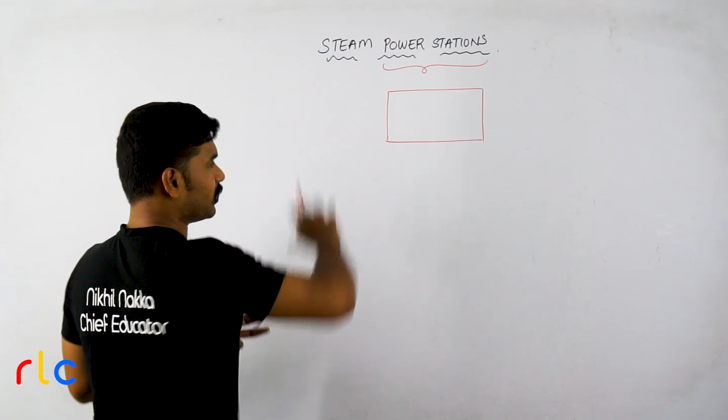Power station is a station. What is a station? Station is a combination of some equipments. So there are some equipments in this station. What is this equipment doing? This combination of equipments is the station. This station will convert some form of energy which is directly available in the nature into finally electrical energy which we require,

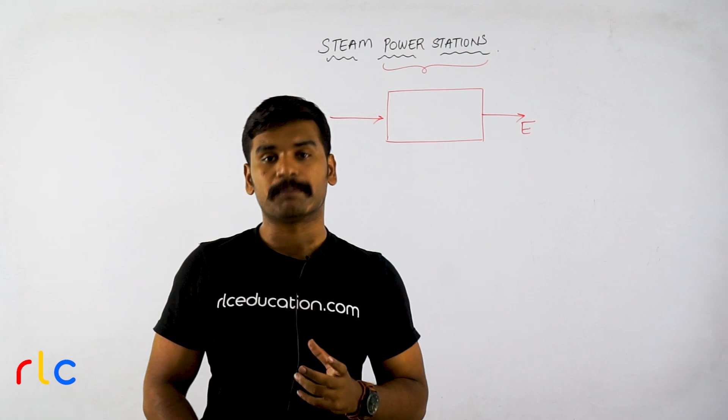because that is what our aim is, because energy resources are scattered and different types of energy resources are available in the nature which are actually useful to us. But the problem associated with such energies is that they are not available whenever you want, and another problem is the transportation problem. Therefore, we are dealing with a unique energy called as electrical energy. So, we are using a combination of equipment called as a power station. He will convert some form of energy into electrical energy.

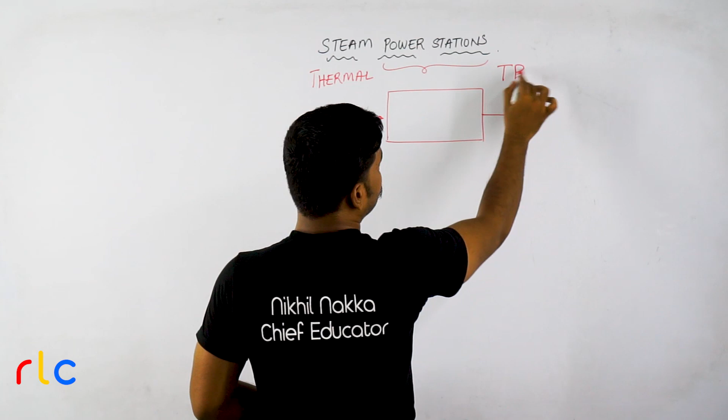So, if that conversion process from some other form of energy to electrical energy involves steam, then it is called as a steam power station. This steam power station has got another name, generally called as thermal power station. So we will be using this short form TPS, thermal power station, throughout our discussion. Why is it called as thermal power station? Because steam is a representation of thermal energy, which is nothing but heat energy.

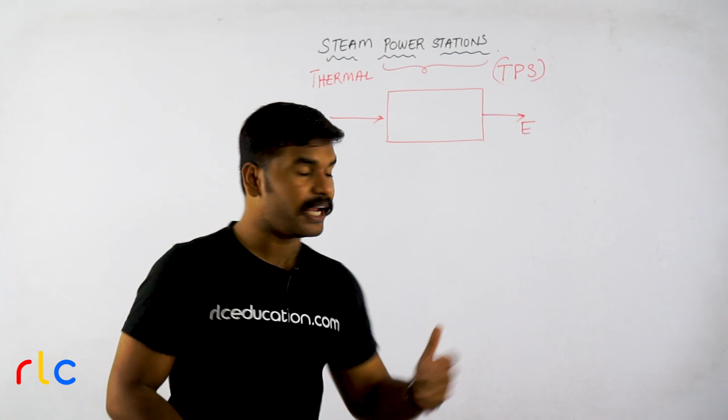How can you say that? Because what is a steam? Steam is nothing but evaporated water, isn't it? When water traps heat, then it will be evaporated into water vapor. That is called as the steam. Therefore, steam is nothing but the representation of thermal energy. So, any power station which involves production of steam in order to create electrical energy is called as a steam power station. So, to produce steam in any steam power station, what do we require?

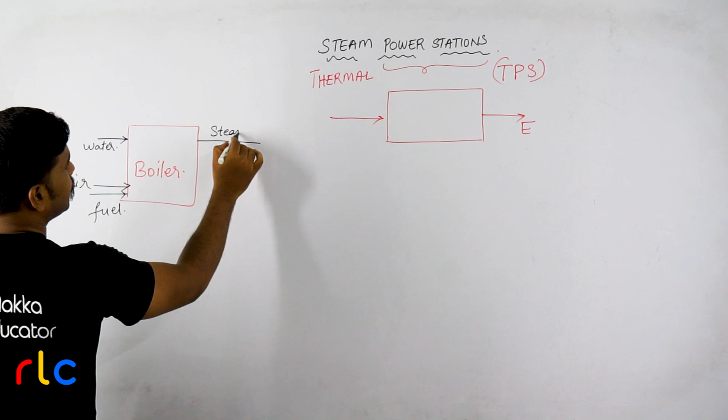We require a device which can produce steam. We are calling it a boiler. To this boiler, as the name itself says, it requires some water, and you also have to supply it with some fuel, and along with fuel you have to supply air. Why? Because you want to burn the fuel in the presence of air so that you will get the heating effect. This boiler has got a furnace where you will supply the fuel and air mixture, and this will heat up the water, and this water will boil, and finally from the boiler you will get steam. So this is how we produce steam in a steam power station.

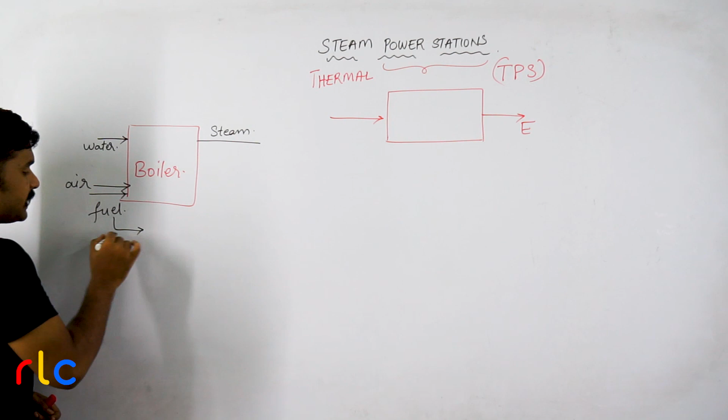Now the next important thing that we have to consider is, in this boiler you have to burn the fuel. What is the fuel? So the point here is the fuel type. In a thermal power station, the fuel may be coal or it may be oil. Depending upon that particular country's geographical condition or mineral resources, whatever is most easily available will be the fuel. For example, in India we are plenty with coal reserves, so most Indian thermal power stations use coal as input fuel.

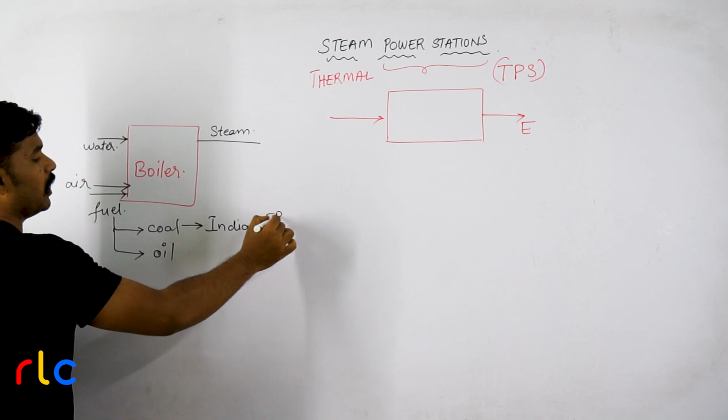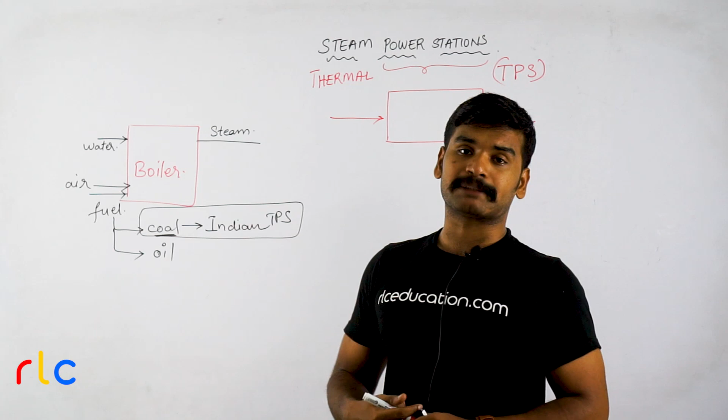So this becomes a very important question for competitive exams. They ask the input fuel for thermal power stations in India, and it is coal, not oil. In US, it is majority oil. In Middle East countries, depending upon their availability of fuel, it is oil. But in India, we are having plenty of coal reserves, therefore coal is the input fuel for Indian thermal power stations. Now, in the Indian context, there is one very important relevance of thermal power stations. That is, in India, 67% of power is generated from thermal power stations only.

So that is the significance of thermal power station. This thing we have already seen. So in the exam, he will ask you how much is the share of power generated from thermal power stations in India. That is 67%, or you may also say 2/3 of total power generated in India is from the thermal power stations only.

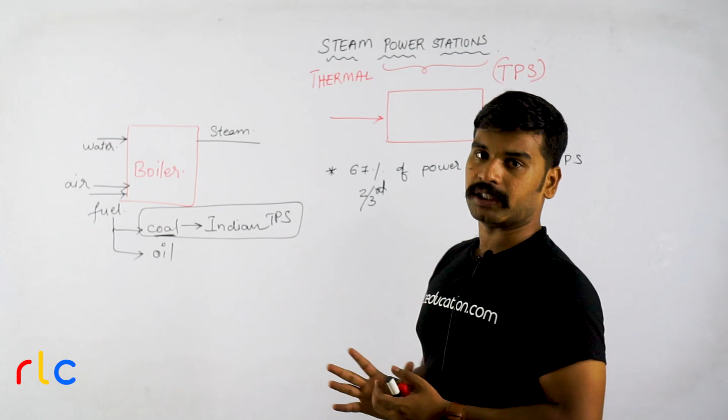So okay, now we will see how this production of steam will actually help us in converting some form of energy into electrical energy. Now, if you see here, initially what is directly available in the nature? Tell me what is the natural resource that is available in the nature? That is nothing but the fuel. In India, coal. Now you are having coal. So my final intention is to convert coal into electrical energy in this thermal power station. So what is that energy present in the coal? Coal has got chemical energy. The form of energy in coal is chemical energy.

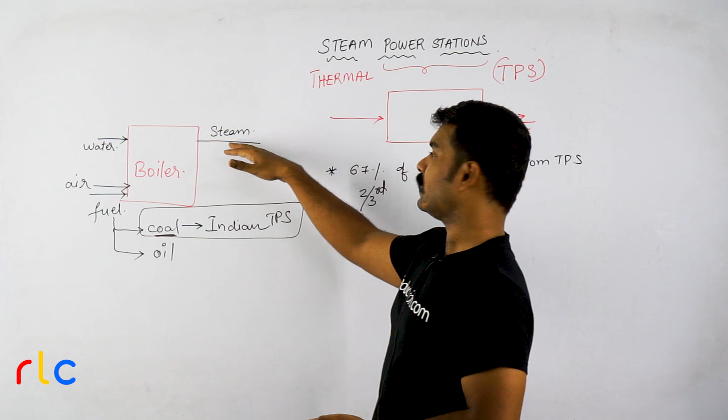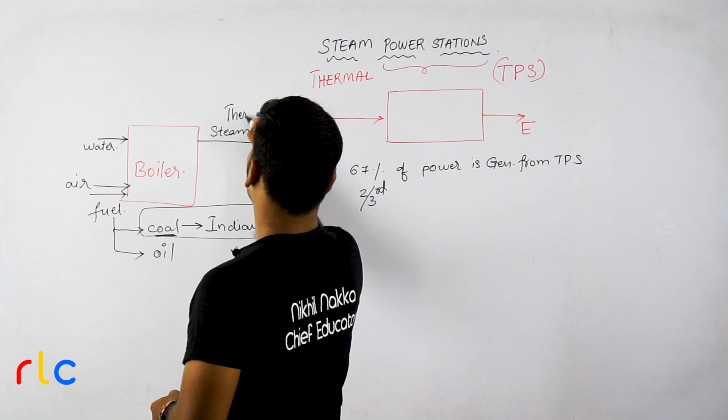Upon heating coal in the boiler, you are getting steam as output. Steam is a representation of what energy I told you? Heat released by burning of fuel is utilized by the boiler to heat the water and create steam. To the boiler, input energy is chemical energy in the form of coal. Output energy from the boiler is steam, which is also called as thermal or heat energy. Okay, thermal energy is created.

Now you see different processes will take place, or a combination of equipment will try to process this energy. What energy is directly available? Chemical energy in the form of coal is there. So that you are processing in different stages and finally make it into electrical energy. So that is the entire gist of thermal power station.

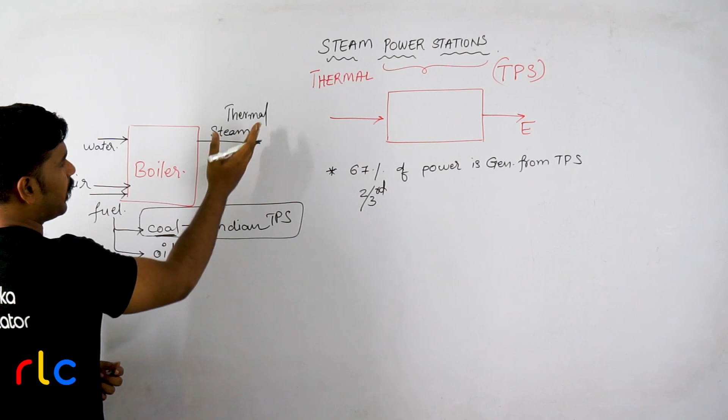So once you get steam from the boiler, this steam has got certain temperature and some pressure. When the steam is having pressure, it is moving in the tubes. So with this pressure, this steam will strike the blades of a turbine. So there we are having a device called a steam turbine. What will this steam turbine do? Let us say a steam turbine is simply like a wheel, something like this. This is not exactly, but something like this.

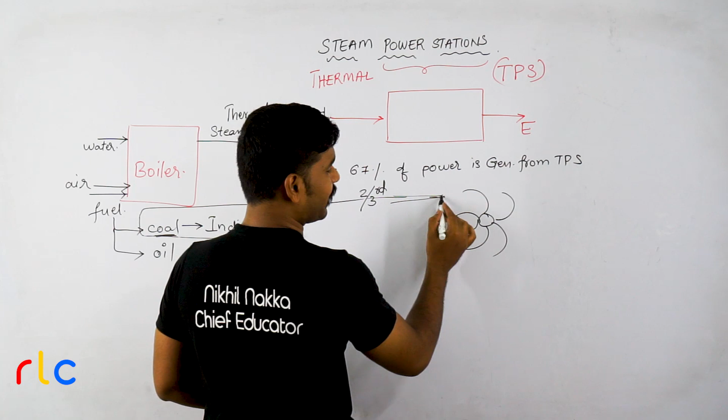Let us say I am having a pipe which is carrying steam. Now in this pipe steam is coming and you are releasing the steam, and this steam is striking these blades which are mounted on some rotor. So this fellow starts rotating. So what is the turbine actually doing? Turbine is converting steam energy or thermal energy into mechanical rotation at the output. So turbine is an energy processor which will convert thermal energy into mechanical energy.

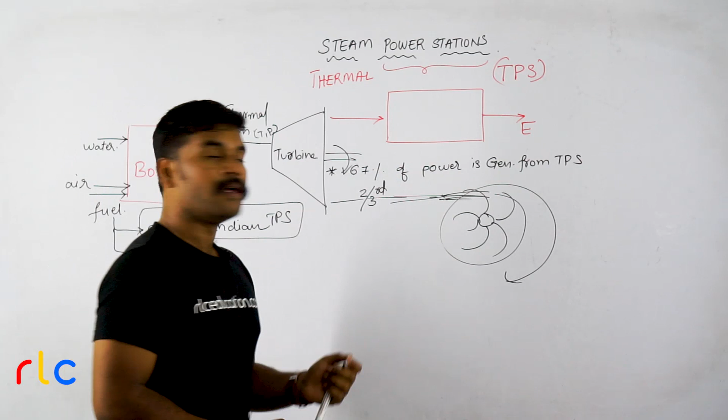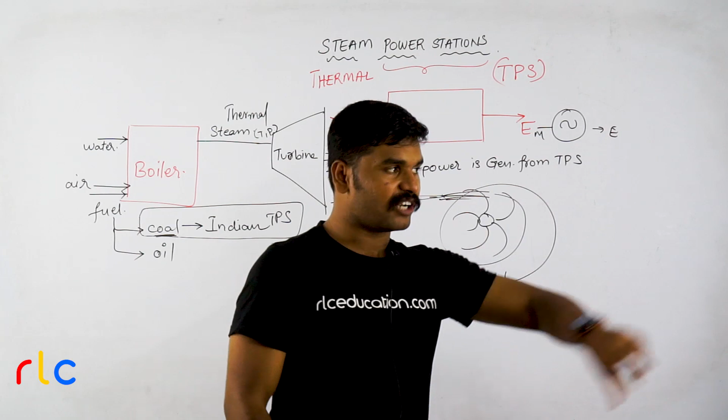Now once you got mechanical energy, in electrical engineering, what is that device which is used to produce electricity or EMF? Generator, isn't it? A generator is a device which takes mechanical as input and provides electrical as output. So the entire drama that takes place in any power station is to convert that particular form of energy which is available in the universe to mechanical energy. Once you get mechanical energy, your job is done. Just put a generator, generate electricity, that's it.

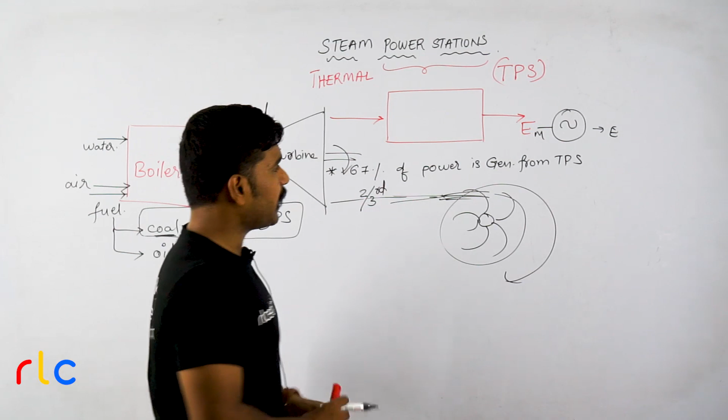Understood? So this entire process of production of steam and all is to finally create mechanical energy or a mechanical rotation. Once you got the mechanical rotation, supply it to the generator and you will get the electrical energy output. So that's the entire formula, or I can say the entire conclusion for thermal power station.

So to define technically what is a thermal power station: it is a power station in which heat released by burning of coal is utilized by the boilers to raise steam at high temperature and pressure, which is used to drive a turbine which is coupled to an electric generator. That's it. So that is the definition of a thermal power station. This definition itself says everything.

So if you look at the exchange of energy, as I told you, according to the law of conservation of energy, energy can be neither created nor destroyed. It can just transfer from one system to another system. So here we are having the coal energy or some fuel energy, converting it into electrical energy. Let us see what is actually happening.

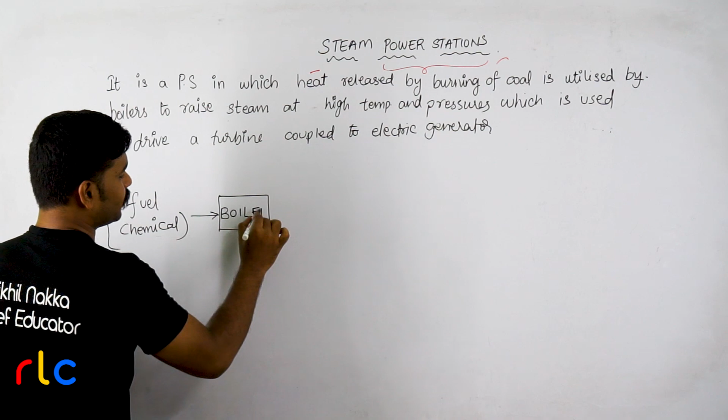So if you look at this thermal power station, initially you are having some fuel, hydrocarbons, which is having some chemical energy. This chemical energy I am going to supply to a device called a boiler. The boiler provides you output as steam. What is this steam? Steam is nothing but thermal energy. And this thermal energy or steam energy is supplied to some device which is called what?

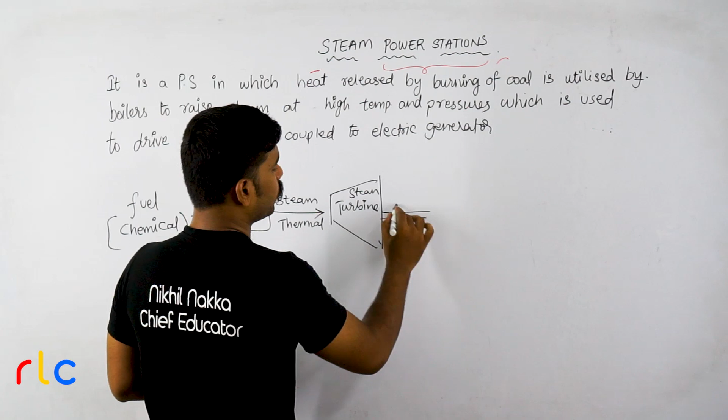A turbine. It is a steam turbine. What is this steam turbine doing? It is taking thermal energy as input and providing you rotation of shaft as output. This rotation of shaft is nothing but mechanical energy. And this you are coupling to an alternator or a generator, and once you give mechanical energy to the generator, you will get electrical energy as the output.

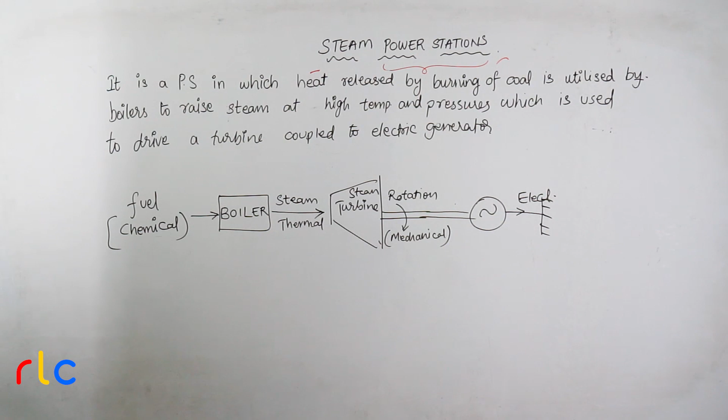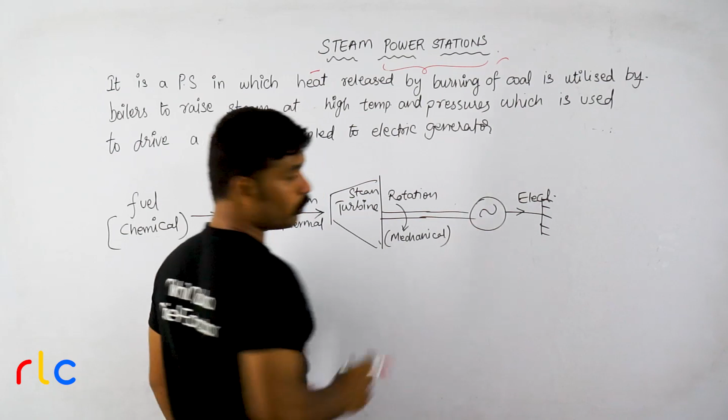So this is how energy is processed in a steam power station, or simply any power station is basically an energy processing setup. You have input as chemical energy, and you process it in 3 levels. At the boiler you are converting chemical to thermal, at the turbine thermal to mechanical, and at the generator mechanical to electrical. So 3 stages, or 3 levels of conversion, are involved.

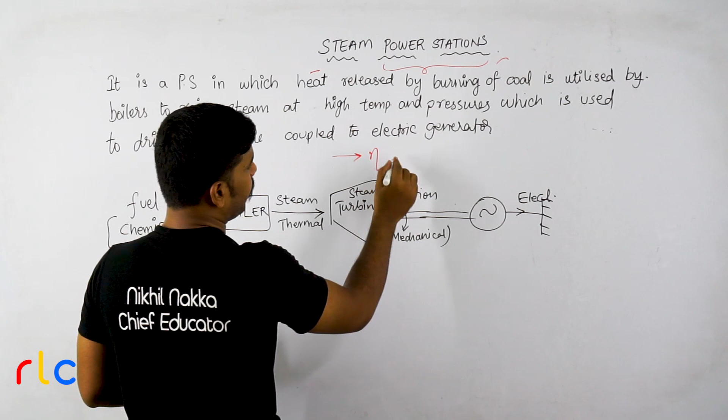Practically, when energy transfers from one system to another, not all of it transfers; a part is lost in the form of losses. So more the number of stages of conversion, more will be the losses. A steam power station has more stages of conversion, therefore more losses and poor efficiency. The efficiency of this conversion process is around 29 to 32% for a thermal power station.

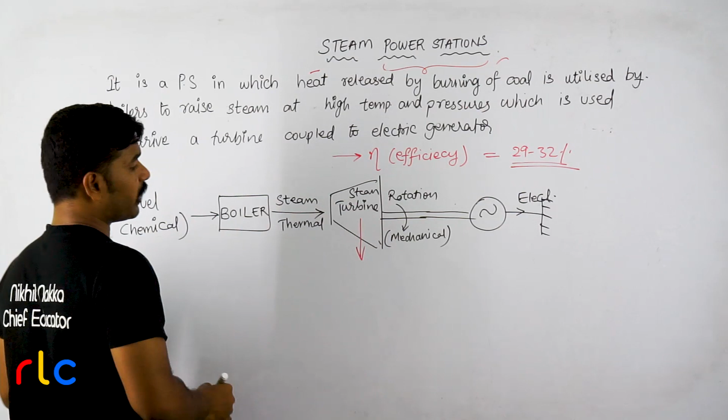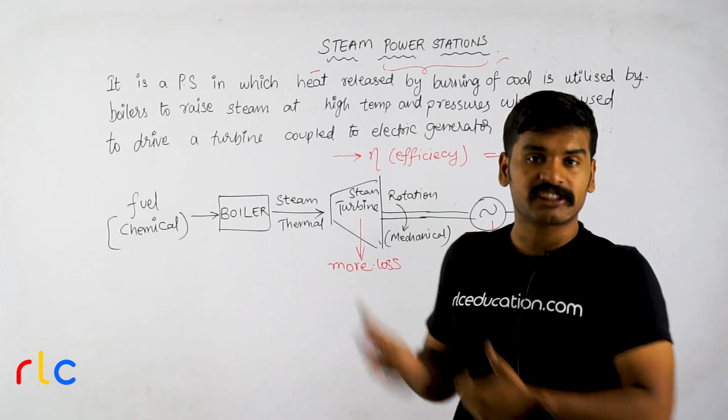Why? Because there are 3 stages of conversion involved. You get more losses in this stage, the turbine, and the least losses in the generator. Since energy conversion takes place at 3 devices, the boiler, steam turbine and electric generator are the core components of a thermal power station. Without these 3 things, you cannot construct one. Others are like accessories which enhance its functionality or improve its efficiency.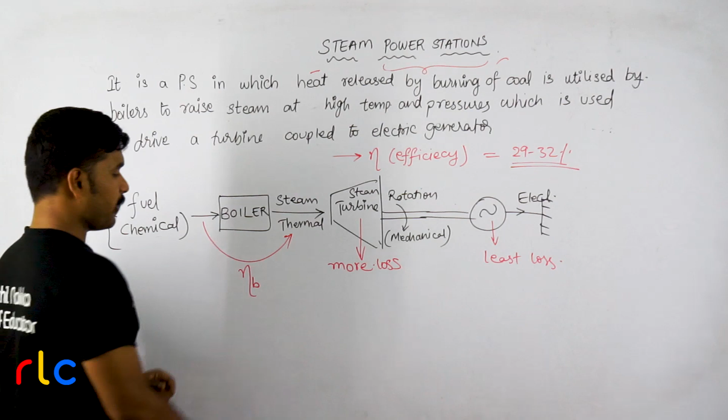At the boiler you have energy conversion from chemical to thermal, so we can define a boiler efficiency, eta B. At the turbine you have efficiency eta T. Turbine efficiency is also called thermal efficiency. This forms an important MCQ. Why? Because the thermal energy produced is actually processed by a turbine.

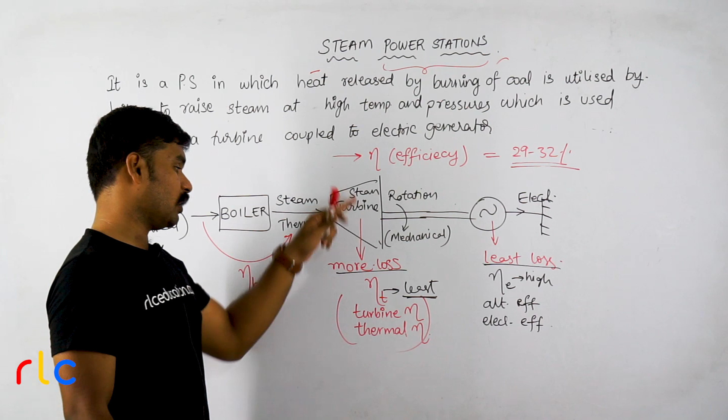Next, the electric generator has an efficiency eta E, also known as alternator efficiency, generator efficiency, or electrical efficiency. Electrical efficiency is the highest because losses are less. In the turbine more losses are there, therefore it is the least efficiency. The reason for the low efficiency of a thermal power station is the low efficiency of the turbine. And this is the overall efficiency of a thermal power station.

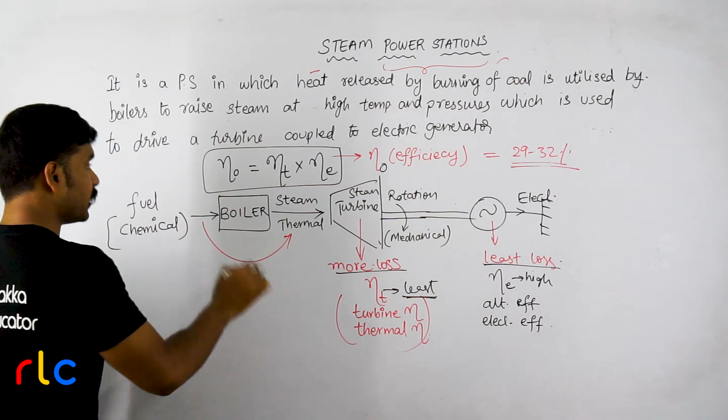And how do we define overall efficiency of a thermal power station? Overall efficiency, eta O, is given by efficiency of turbine into efficiency of generator. That's it. You shouldn't consider the efficiency of boiler due to some reasons which is out of scope of our subject.

Just be convinced that overall efficiency means we will consider the more loss component and least loss component, and boiler is not standardly taken as an efficiency. So overall efficiency will consist of turbine efficiency into electrical efficiency. Some people also say it will be the product of boiler efficiency into turbine efficiency into electrical efficiency.

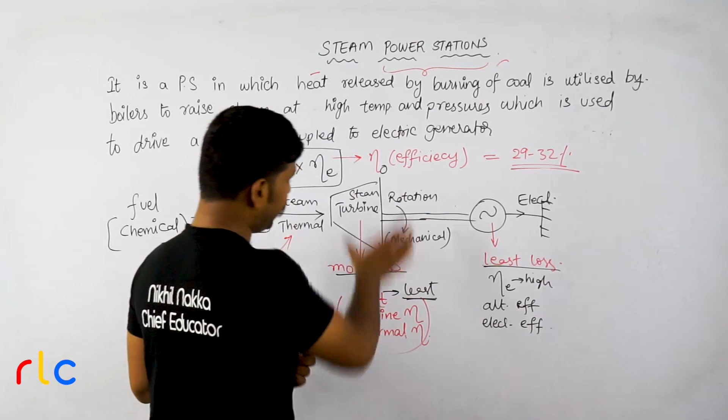Yes, this is the correct figure. Actually, by taking boiler efficiency, we will deviate from the actual figure we are interested in. Why? Because we are having more losses in the turbine, since efficiency of a steam power station mainly revolves around the efficiency of the turbine. That's where more losses happen, and this is the significant efficiency actually trying to reduce the overall efficiency.

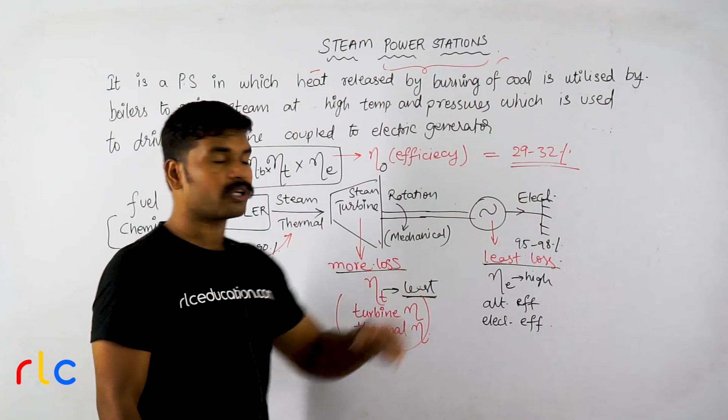Electrical efficiency is very high, around 95 to 98%. Therefore, even though you consider electrical efficiency, the overall efficiency figure is not going to change much. But if you consider boiler efficiency, whose efficiency varies between 70 to 90%, it will create a significant change in the overall efficiency figure. So due to such factors, we don't consider boiler efficiency, but take overall efficiency as turbine efficiency or thermal efficiency into electrical efficiency.

Now I want to explain an interesting aspect or important concept associated with thermal power station, which you rarely find in any textbook or notes. The three important main parts in the construction of a thermal power station are boiler, a steam turbine, and an alternator. This thing we are clear now.

Now there are some thermal power station aspects. To the boiler, what are the inputs? In a thermal power station, boiler will have basically three inputs. What are those three inputs? First, to the boiler you have to supply with water.

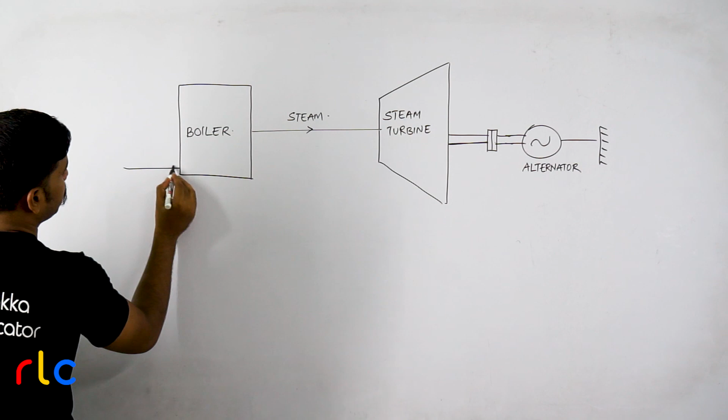Okay, you have to supply with water. And next, what do we have to supply? We have to supply fuel. In the fuel you have to burn, and along with the fuel you have to also supply air, in the presence of which the fuel will combust, because you require oxygen or air for combustion. That thing we know.

So what are the inputs to the boiler? Three inputs to the boiler: air, fuel and water. Very, very important, please be careful and attentive in understanding this. Three inputs to the boiler and one output from the boiler, which is the steam.

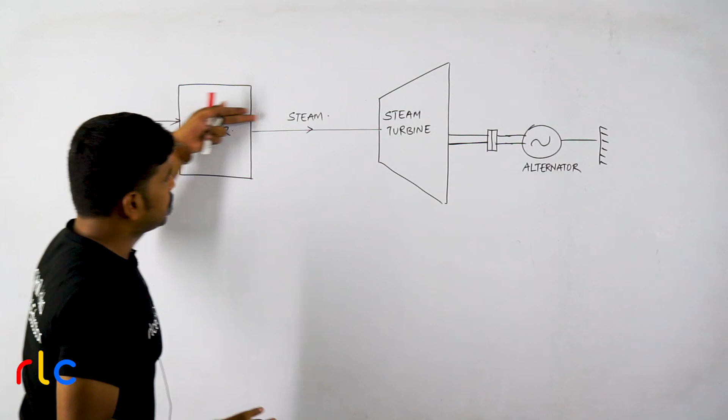This steam will go to a steam turbine, and in the steam turbine this steam will expand. What do you mean by expansion of steam? Steam expansion means steam is rotating the turbine. In the process of rotating the turbine, pressure will drop, because the steam is impinging the blades of the turbine and dropping the pressure as the blades rotate.

Understood? So according to universal gas constant, PV is equal to constant. Pressure and volume are inversely proportional. If pressure drops, volume will increase. That is the reason why we always represent a steam turbine in this fashion. This is the standard diagram for a steam turbine, meaning that at the inlet if you have some volume, by the time you go out the volume will be rising, because there is a drop in pressure.

So how much pressure will drop, sir? That is the question I am giving you. How much pressure will drop in a steam turbine? Let me give you an example. Steam turbine means it should have some input and some output, which is nothing but exhaust, like your vehicles have an exhaust silencer, isn't it?

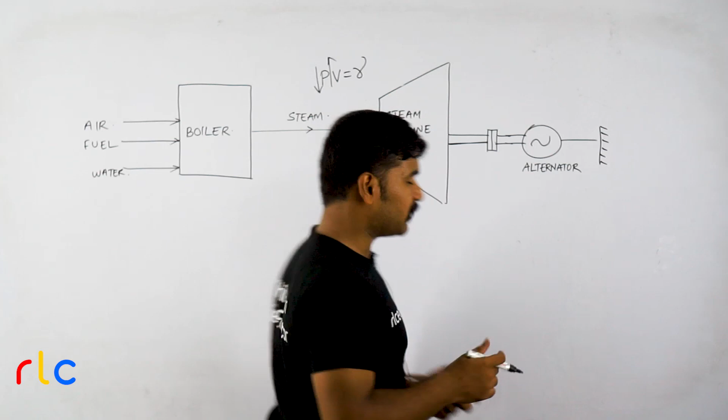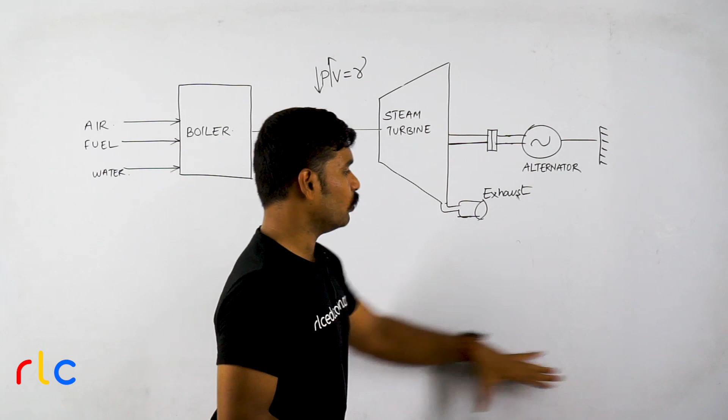Let us say steam turbine is also having some silencer like this, a Royal Enfield silencer kind of thing. Let us say this is exhaust, and this is exhaust. Where is this exhaust connected to? This exhaust is in the atmosphere. This exhaust outside is what? Atmosphere. And what is the inlet to the steam turbine?

Inlet to the steam turbine is from the boiler. Steam is the inlet to the steam turbine. So in the boiler, steam is generated at a certain pressure. Let us say, for example, the pressure is some 100 units.

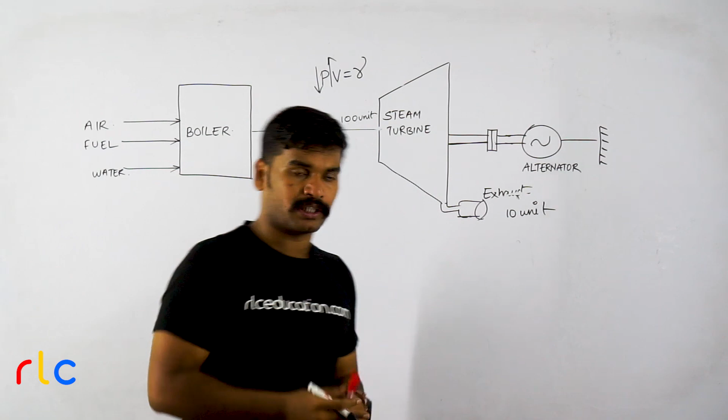Input pressure of 100 units is coming into the steam turbine. But the outlet, let us say exhaust, what is the exhaust connected to? Exhaust is connected to the atmosphere, and let us say atmospheric pressure is some 10 units. Atmosphere will naturally have some pressure, isn't it? Now tell me, what is the difference in pressure?

What is the pressure difference finally available in the turbine? Here 100 units, at the exhaust 10 units. In between, how much are you having? 90 units of pressure is there.

But actually in this boiler, how much are you producing? You are actually producing 100 units. And how much coal are you using? You are using that much amount of coal which is enough to produce 100 units. But actually, with how much pressure is the turbine rotating? The turbine is actually rotating with 90 units of pressure only.

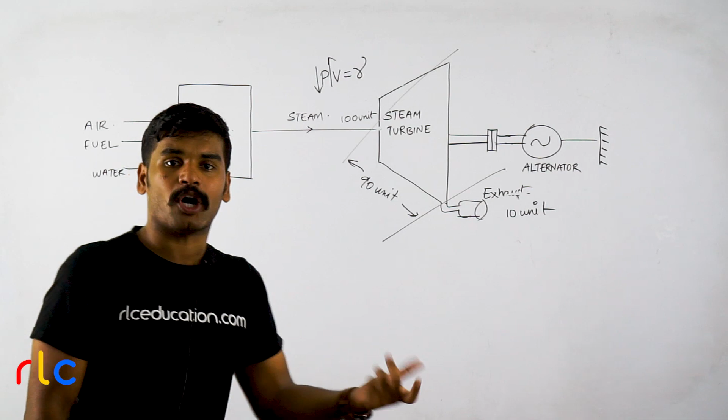Then what happened to the remaining 10? Did dogs take it away? No. Due to the presence of higher pressure on the exhaust side, you are not able to use whatever you are totally producing. Because of this exhaust, you are not able to totally utilize the entire thermal energy that you have produced in the boiler, and that is why the turbine efficiency will be very low due to this factor.

So now tell me, sir, what can we do to improve this situation? What is the situation? I am supplying 100 units of pressure, but actually only 90 units of pressure is acting in the turbine. So the remaining 10 are getting lost.

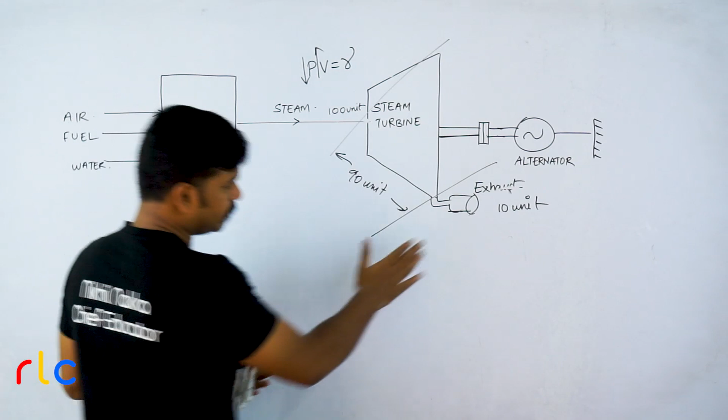So there are two things I can do to overcome this problem. Since your exhaust is connected to atmosphere, and atmospheric pressure is some 10 units, it is constant - atmosphere does not change. One thing I can do is increase my input pressure. Let us say, instead of 100, if I make my input pressure 1000, then what will happen to the effective pressure? Effective pressure would be 1000 minus 10, that would be 990.

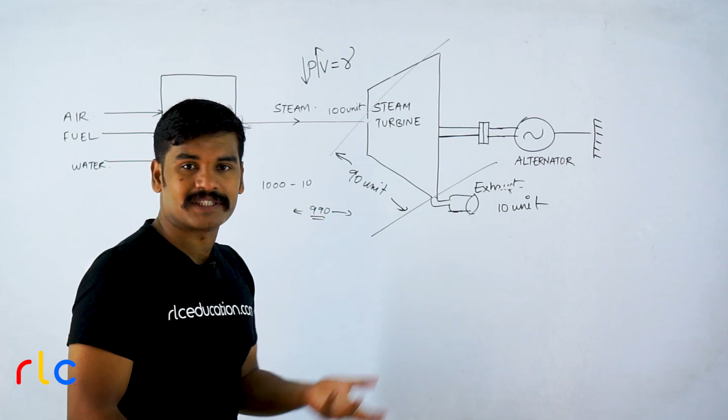In 100 units, 10 units is 10%. But in 1000 units, that same 10 units is simply 1%. So by increasing the input pressure, we may try to improve the efficiency. But do you think increasing the pressure is practically possible all the time? No. Why? Because to increase the pressure, you have to increase the boiler size, cost of the boiler will increase, maintenance of the boiler will increase, and to withstand those huge pressures, you should also have the piping systems or conduit systems. Accordingly, the cost, maintenance and operation also become complex.

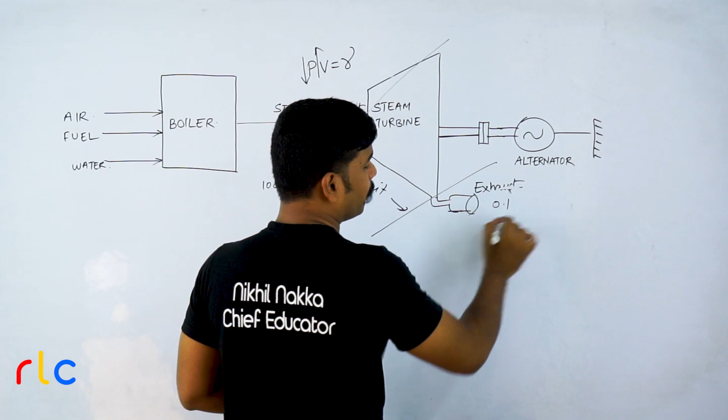So that is not practically possible always, because theoretically you may say we can reduce it to 1%, but it's not like that. The other way is, what if I can reduce the pressure at the exhaust? Let us say, instead of 10 units, by some artificial means, I will maintain only 0.1 unit pressure. If 0.1 unit pressure is there, and input is 100 units, what will be the effective total units? 99.9 units. Don't you think the efficiency is increased? Yes, turbine efficiency will increase, isn't it?

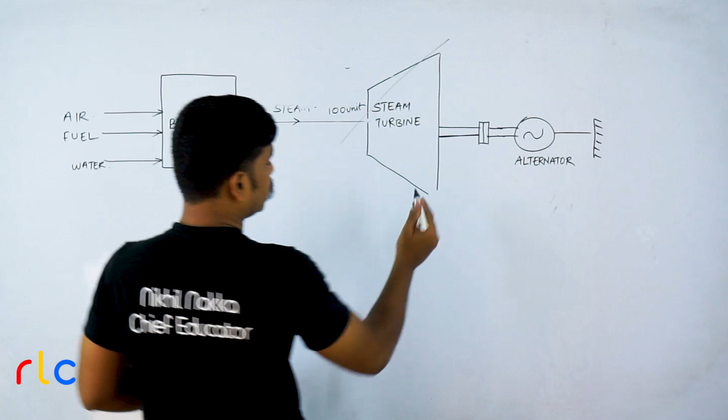So this is the actual procedure that we will follow. What we will do is connect the exhaust to a low pressure unit. We will connect the exhaust of the steam turbine to a low pressure device, which is called a condenser. So this is the output or the exhaust of the steam turbine. I am connecting this to a condenser.

So the condenser is such a place in the thermal power station which has the least pressure, less than atmospheric pressure. That is called a condenser. That is the reason why we connect a condenser. Why? Because now the output of the steam turbine is connected to the condenser, and the condenser has lower pressure than atmospheric pressure. So the effective utilization of pressure will be high in the steam turbine, thereby you can increase the efficiency of the turbine. So that is the effect of the condenser.

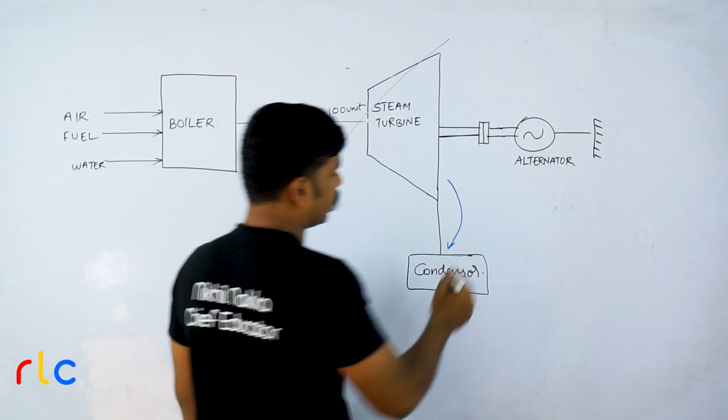The process in which steam is exhausted from the turbine to the condenser, the transfer of steam from turbine to condenser, is called bleeding of turbine. Very important point: bleeding of turbine means removing steam from the turbine and sending it to the condenser. So removal of steam from the turbine itself is called bleeding of turbine.

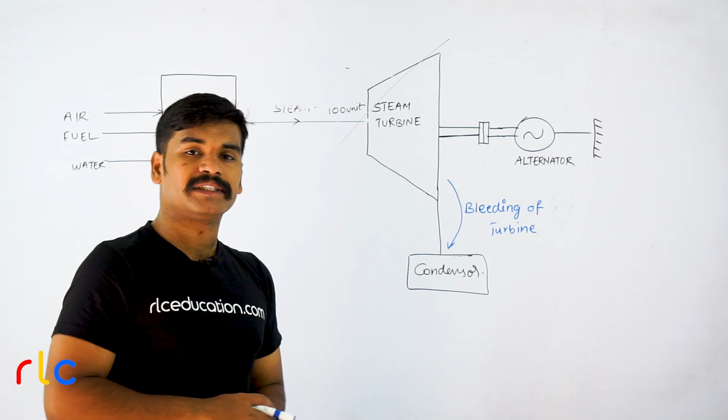Now what happens in the condenser? As the name itself says, it will do some condensation process. What is condensation process? Conversion of gas into liquid. Initially in the boiler, evaporation takes place because water is evaporated and converted into steam. This steam does useful work, expands, and comes back to the condenser. Steam is in gaseous form; in the condenser, steam converts back into liquid, that is water.

So once in the condenser, steam is converted back into water, I will use a pump. What I will use is a very big pump.

The pumps used in a thermal power station, do you know the rating? They are rated in megawatts. The power produced from a thermal power station, a greater portion of that power again has to be utilized back by the components of the thermal power station to make it run. That is the reason why the overall efficiency is also very poor.

So what this pump will do is extract the water that has been formed in the condenser and supply it back to the water circuit, and we try to recycle the water like this.

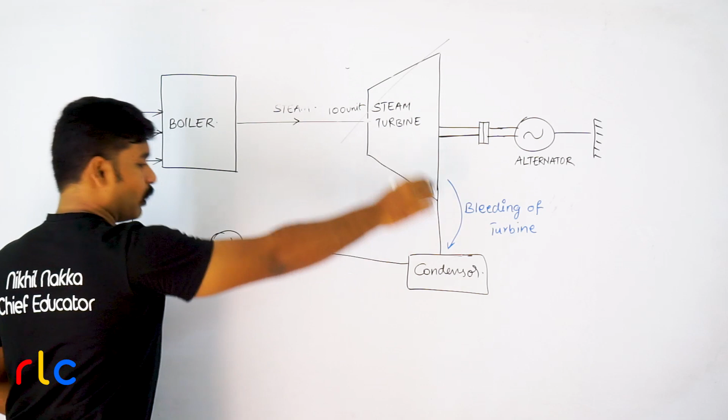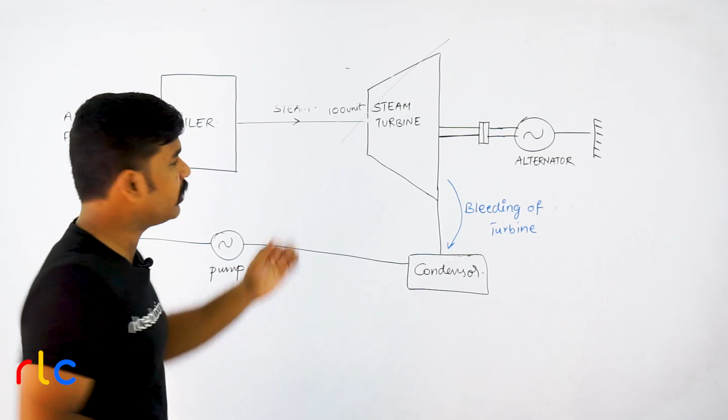So this cycle of evaporating the water, taking work from the steam, condensing the steam, and again sending it back to the boiler. The water, or the working fluid, is the fluid circulating in the cycle. Here it is water. Water is catching some heat energy. In the steam turbine, it loses a bit of that heat energy. Again in the condenser, the remaining amount of total heat is lost. And again it went back to the boiler.

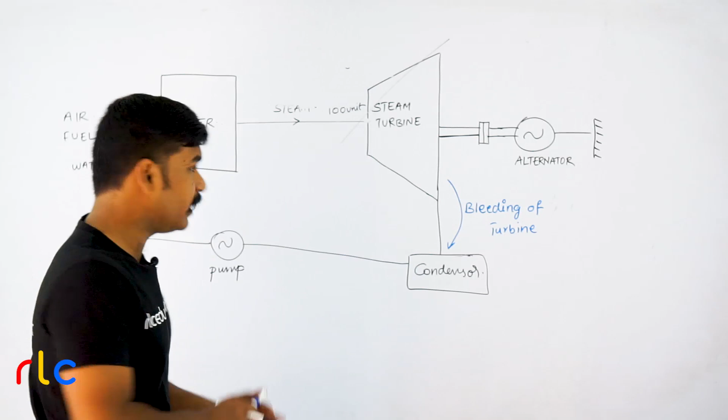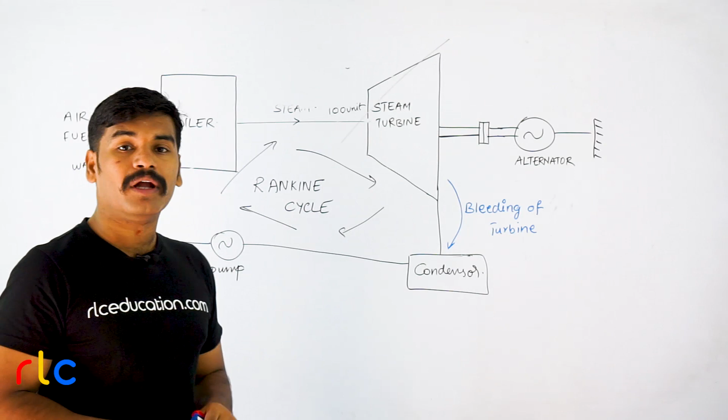So this cycle of gaining heat and losing heat, this entire cycle itself is popularly called the Rankine cycle. That is the reason why you generally hear this popular MCQ question that thermal power stations operate on a cycle called the Rankine cycle. Thermal power station operation is based on the Rankine cycle. You rarely find an explanation about this Rankine cycle in any textbook.

And they may also ask you what is the efficiency of the Rankine cycle. Efficiency of Rankine cycle will be around 32%. That is about the efficiency of Rankine cycle.

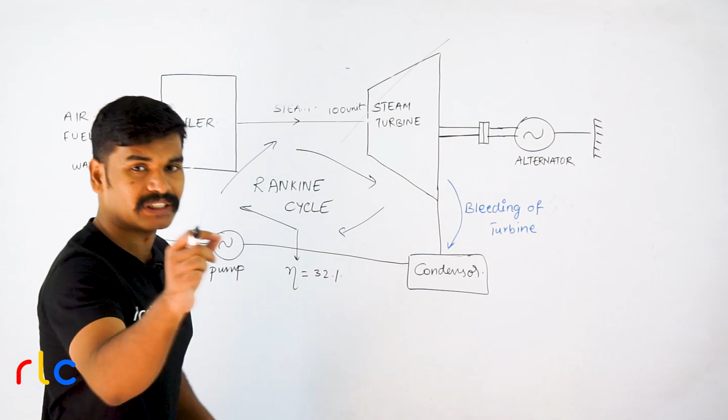Next, when will the Rankine cycle efficiency be maximum? When the heat losses are less, meaning in the summer season. In summer time, the Rankine cycle will have more efficiency, and in rainy or winter seasons the Rankine cycle efficiency will fall down. These are other aspects you can just write down, I will not write on the board.

And tell me where the major amount of heat has been lost. In the condenser. So we can say that in the condenser, the major amount of heat loss takes place.

So now we understood that the thermal power station efficiency is very poor. So how can we improve that? Don't you think there is a way? Yes, before understanding how to improve a thermal power station's efficiency, you must understand what factors actually govern or affect the efficiency of a thermal power station. So that is what we will discuss now: factors affecting efficiency of thermal power station. There are three main factors, and by controlling such factors you can try to control the overall efficiency of a thermal power station.

So the first factor is temperature of the steam. Next factor is pressure of steam. Third factor is pressure in condenser. These are the three factors which will actually affect the overall efficiency of a thermal power station.

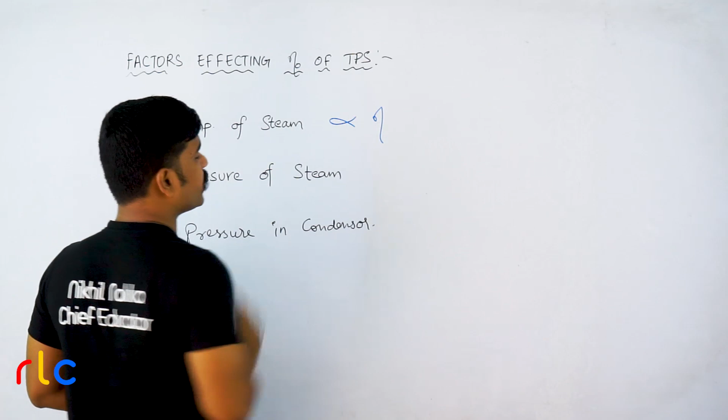Now tell me sir, how should these parameters be in order to maximize the efficiency? In fact, temperature of the steam is directly proportional to the efficiency. That means if the temperature of the steam increases, overall efficiency of a plant increases, and pressure of the steam is also in direct proportion to the efficiency. So more the pressure of the steam, more will be the overall efficiency.

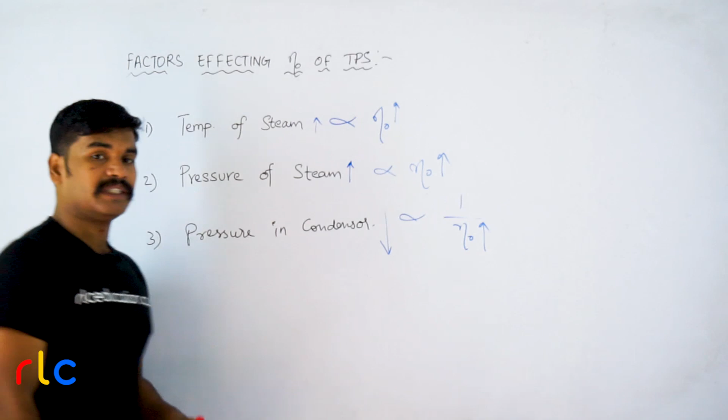Now tell me about pressure in the condenser. It is inversely proportional to the overall efficiency. Lesser the pressure, more will be the efficiency. So the pressure in a condenser must be less, but the pressure of the steam must be high to have the maximum overall efficiency. So these are the factors that actually affect the overall efficiency of any thermal power station.

Now in this section I will try to classify thermal power stations based on usage, okay. That means the purpose of use. So basically thermal power stations are constructed for two purposes only. The first purpose is called commercial purpose, and the next is called industrial plant. So you have commercial plants as well as industrial plants. Commercial plant means a thermal power station which is set up to do business. Do business means produce power to sell it.

Understood? So obviously the ratings of commercial plants will be higher, whereas industrial plant is such a plant which is set up by some private industry to supply to its own unit. Let us say you are a car company and you are having a car manufacturing unit, and you are setting up your own thermal power station to supply your own power. You don't want to take the power from the utility. You want to create your own power and use it. So such a plant is called an industrial plant.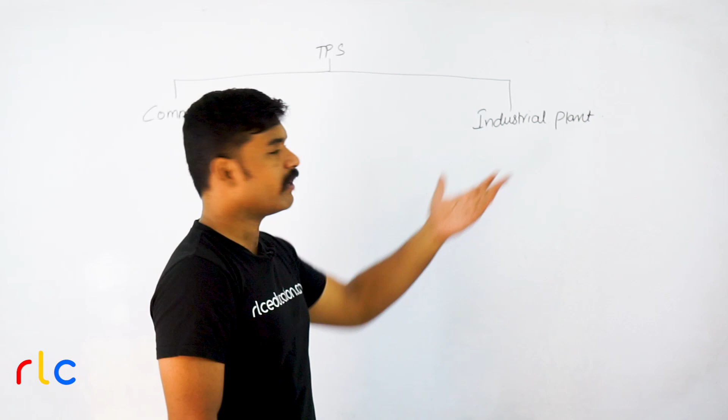Can you tell me what will be the rating of industrial plant as compared to a commercial plant? Very less. Industrial plants are small rating because they are set up for only one exclusive consumer. Whereas commercial plant is for commercial operations, that is selling of power to various consumers. So obviously the rating of commercial plants will be high.

So if this commercial plant is set up by governments, these plants are also called GENCO plants. I'm talking in general terms, this is not a standard terminology. In some states you call it GENCO plants, that means generation corporations basically. These may be central government or state government.

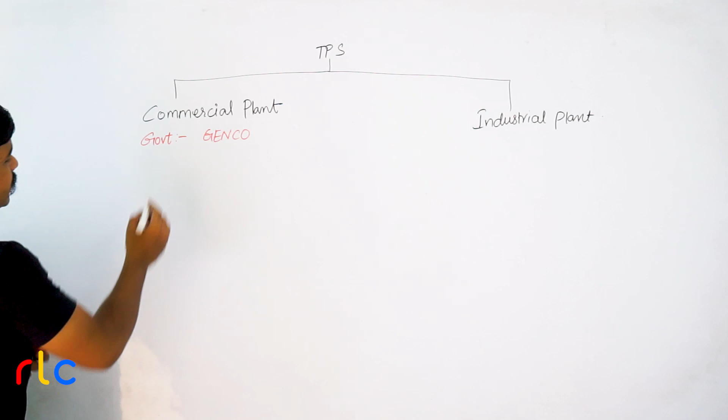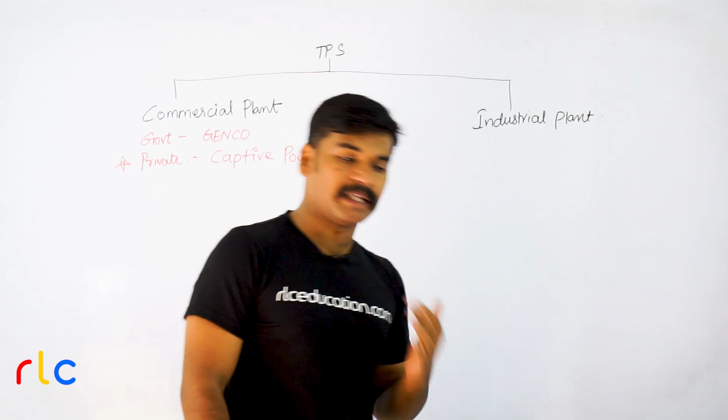Next, if commercial plant is set up by a private person, this becomes a very important question. Commercial plant set up by a private utility, a private person, is called a captive power plant. This is a very, very important concept. For example, a Tata or a Birla or Reliance has set up its own thermal power station, nuclear power station to sell the power. That is called a captive power plant. Whereas if such a private fellow sets up a plant for his own purpose, then it is an industrial plant. Understood?

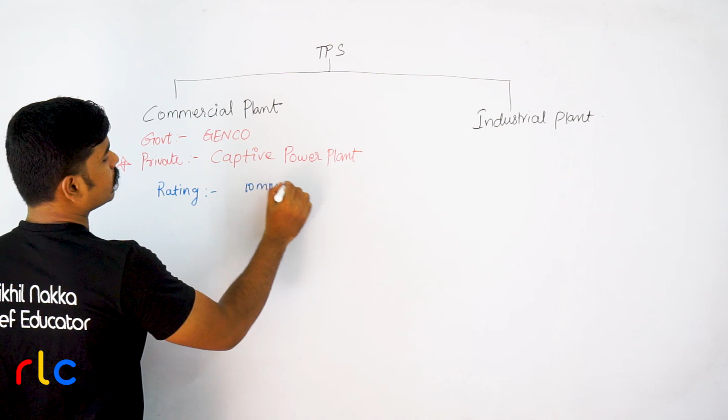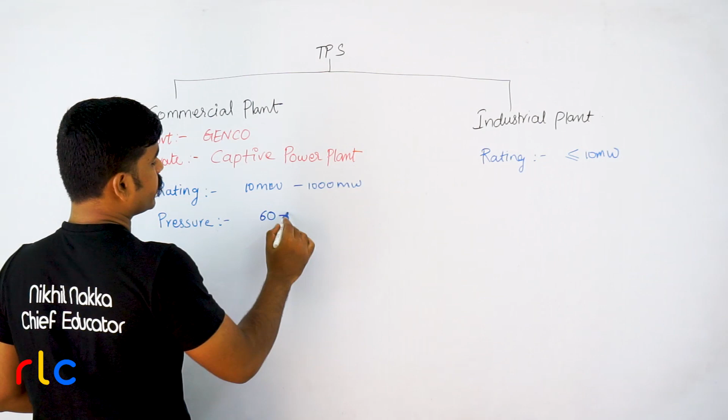Next, if we talk about power ratings, the rating of a commercial plant will be in the range of 10 megawatts to 1000 megawatts, or greater than 1000 megawatts is also possible. The rating of an industrial plant will be less than or equal to 10 megawatts. And the steam pressure in a commercial plant will be in the range of 60 to 70 kg per centimeter square, whereas the pressures used in an industrial plant will be in the range of 1.4 to 7 kg per centimeter square.

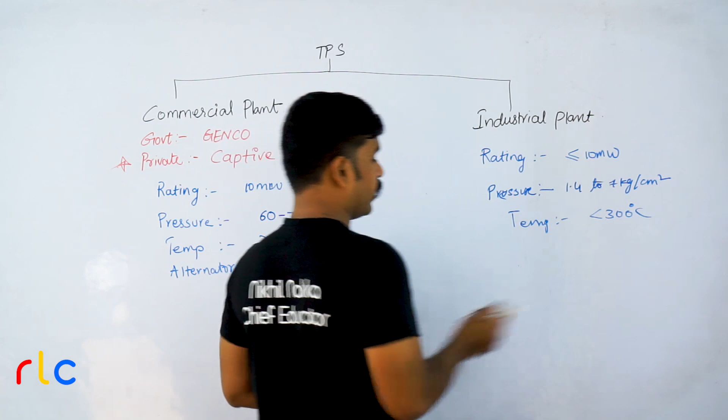Next, the steam temperature here will range from 300 to 480 degrees centigrade, and here the temperature will obviously be less than 300 degrees. And for the type of alternator, we will use turbo alternator, whereas here we will use salient pole type alternator. So these are some differences between industrial plants and commercial plants. And another important difference is that high capacity plants will have a condenser to have more power generation or more efficiency.

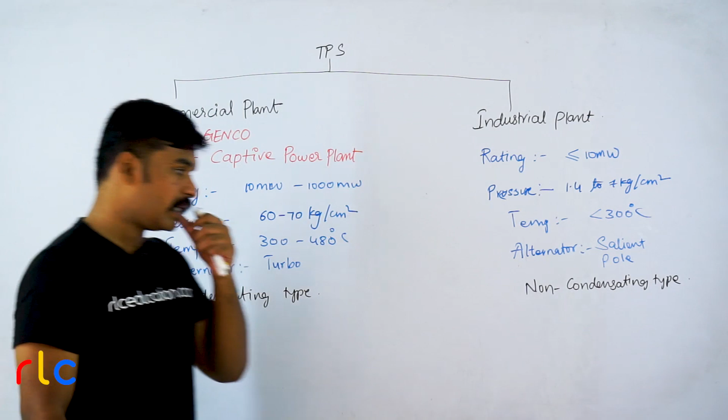So this will be condensing type, and these will be non-condensing type. Condensing type means a power plant which has a condenser. Non-condensing type means one which does not have a condenser. Can you comment on the efficiencies of both of them, which will be high and which will be less? Obviously the condensing type, and the one having high pressures and high temperatures, will have high efficiency.

So the practical efficiencies I was telling you about belong to the commercial plant, that is about 29 to 32% efficiency is possible in commercial plants, whereas industrial plant efficiency will be in the range of 10 to 20% only, because of lack of condenser, that is no low pressure at the condenser, and small temperatures and pressures. So that is about condensing type and non-condensing type.

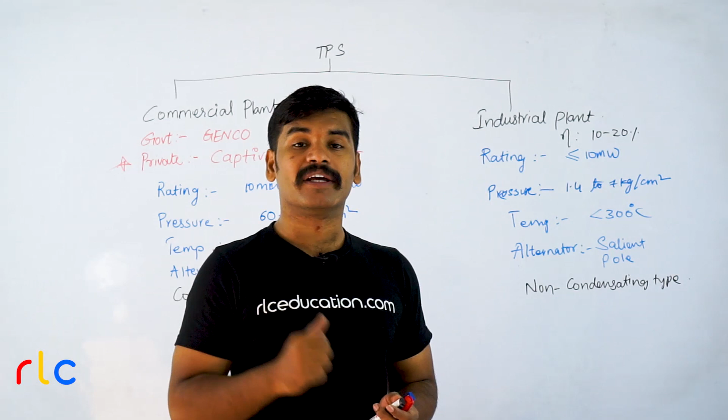Generally they say that if a plant is non-condensing type, there is no condenser. If there is no condenser, where will the output steam from the turbine go? It will be released into the atmosphere. That means there is no recycling of water or condensing that steam back into water and supplying it. So they say that if a plant is non-condensing type, continuous water supply is required, whereas in a condensing type, water may be recycled, so continuous water is not required.

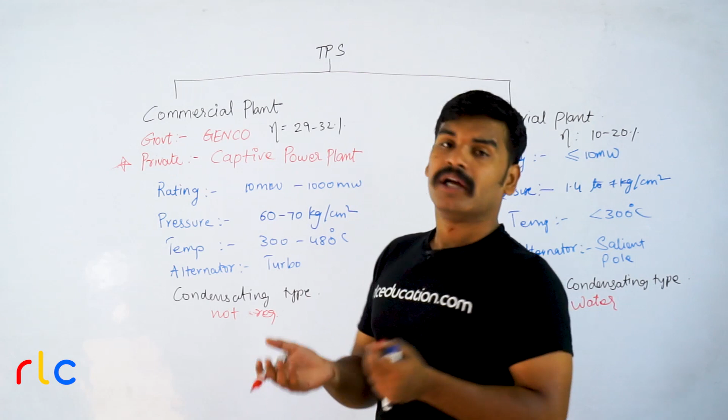So they say that theoretically, but in fact whether it is condensing or non-condensing type, water is compulsorily required at every point of time. Maybe not continuously, but a huge amount of water has to be available in case of condensing. Whereas for an industrial plant, definitely continuous supply is required to produce the power. Here you require ample quantity of water, maybe after some time you can get the water, but continuous requirement is not there. Understood? So that is the difference between commercial plant and industrial plant.

And this is a bit of introduction to thermal power stations. Before ending the video, I want to discuss another important technology that has been in use recently in thermal power stations. That technology is called supercritical technology, and the power plants using it are called supercritical thermal power stations. What is the specialty of the supercritical thermal power station? The temperatures used in supercritical plants are in the range of 600 to 700 degrees centigrade, and the steam pressure is about 300 kg per centimeter square.

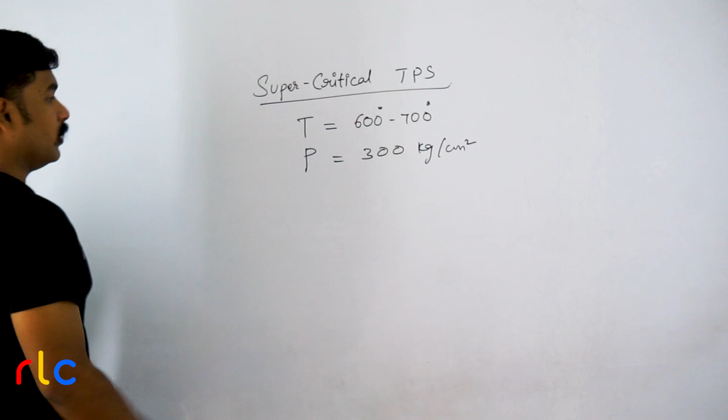Whereas in normal conventional thermal power stations, the temperature was how much? It was around 300 to 480 degrees centigrade. And the pressure was like 60 to 70 kg per centimeter square. Now compare: 300 to 480 versus 600 to 700 degrees, 60 to 70 versus 300 kg per centimeter square pressure. So obviously the efficiency will also be high. The efficiency for the conventional power station was some 29 to 32%. For a supercritical power station, the efficiency will range from 40 to 50%.

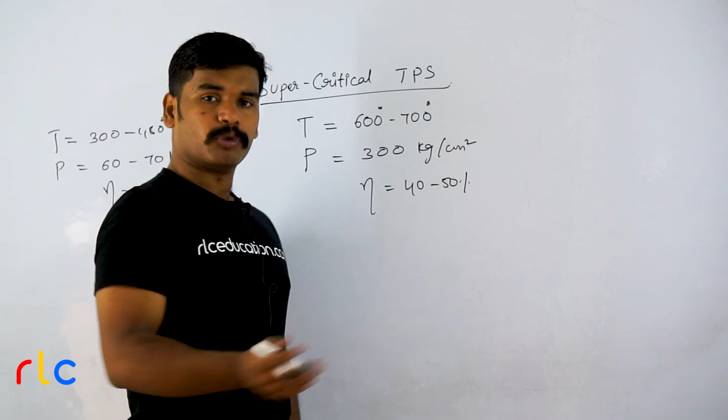The latest plants being set up in India, in most of the states right now, are based on supercritical thermal power station technology. For example, there is a new plant going to be set up in Telangana state. It is called Yadadri thermal power station, with a rating of 4000 megawatts. This thermal power station is also based on supercritical technology.

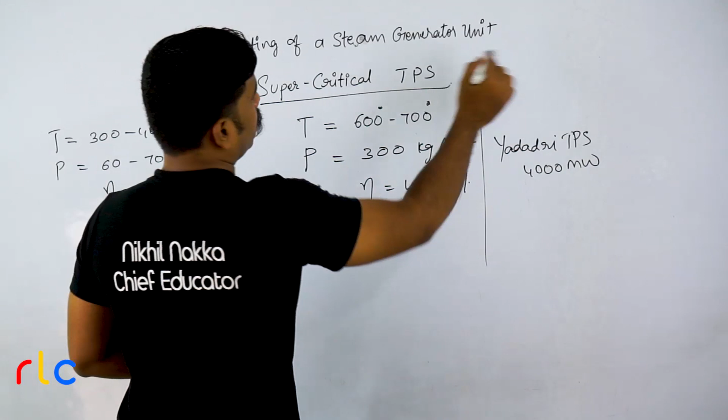Another type of question generally asked in competitive exams is the highest rating of a steam generator unit in India. That is 500 megawatts. What does it actually mean? A steam generator unit means one generator or alternator. We call it a steam generator unit because it is coupled to a steam turbine, that's it. So for a single generator, the maximum rating possible in India is 500 megawatts.

But this is different from the rating of a plant. What is the rating of a power plant? The rating of a power plant is the sum of the continuous ratings of the individual generators. So the maximum rating for an individual steam generator in India is 500 megawatts. This is also an important MCQ generally asked in many competitive exams in India.